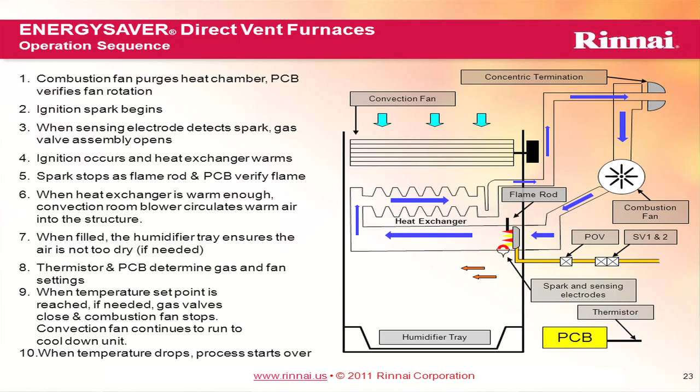And then once the heat exchanger warms, the convection fan will turn on and start moving air across this heat exchanger and ultimately into the structure. We do have a humidifier tray. If you're in a drier area and you would like to keep this full of water, you can, and it'll keep the air a little bit moist.

As I mentioned, our thermistor and our PC board are working together to set our firing rate, to make sure that we're not putting too much heat into the structure. And then when the temperature set point is reached, if needed, the gas valve will close. Of course, our flame will go out, and our convection fan will continue to run to cool down the heat exchanger and to get that last little bit of heat off of the heat exchanger.

The key part of number 9 here is if needed. Remember, because it's continuous run theory, the thermistor is working with the PC board. It may only stage way, way down into its lowest setting and slowly put heat out. So it's not overheating that main room, but we're still getting heat, so it's reaching out to the outer portions of the structure. And then the process starts over as needed as well.

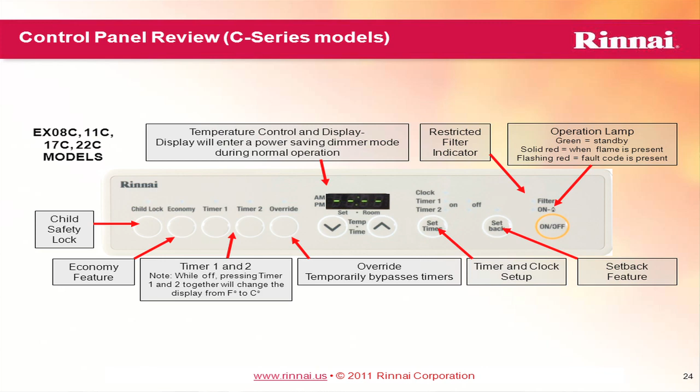Our control panel for most of the products you see here, you can see some of the different features. We do have 2 different timers that we offer on the product. Child safety and economy feature. We can override temporarily our timers if needed without losing our timer settings. And we have a setback feature as well. Working with the timers, you can use the setback feature to run at a lower temperature, maybe in the evening or when you're asleep, or perhaps when you are away and the house is not occupied, etc.

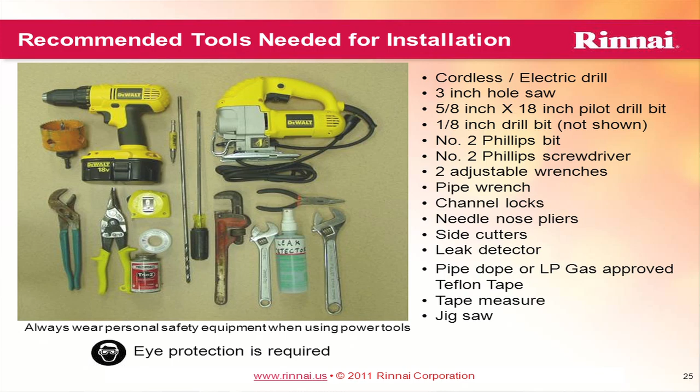So let's jump into the actual installation of the product. This is overall all of the tools that you would need, and you may not need all of these. You may not need the saw, and I'll show you. There's only one instance that you would. This product can usually be installed in about an hour, maybe 2 at the most, if your gas is already there and is available. It is not a hard install at all to do.

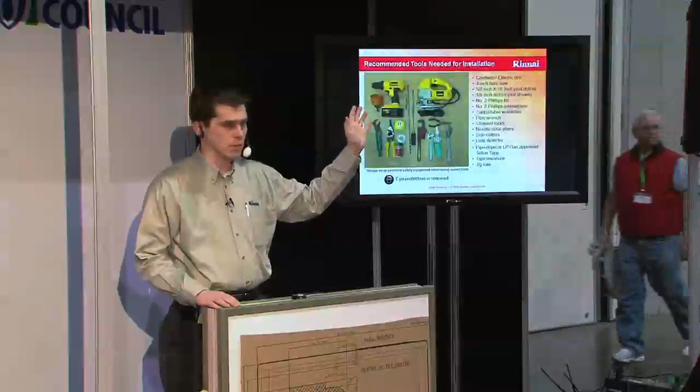Do we have anyone that's installed a direct vent before? I know we had a few people. All right, that's good to hear. I know New England is our biggest market for this product, and partially due because Jack Frederick and his group have been touting this product for well over a decade. So that's good to hear.

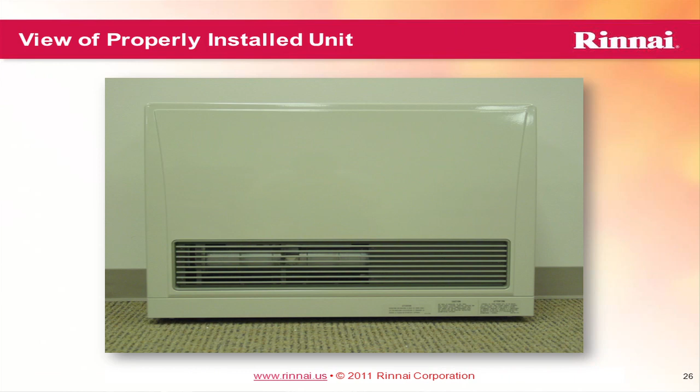All right, so you can see some of the things that we need, and as we go through this today, you'll see some of the things that we're going to do. This is what the product looks like when it is installed. And of course, when you get your box, and you can see I've got one here, you're going to get everything that you need to install this directly through the wall that it is installed on.

Now, if you need to have your vent termination somewhere else, let's say you're in a basement, you need to run up and then out, we do offer extension kits, and I'll briefly cover those toward the end of this presentation. But if you are going right through the wall, we give you everything you need.

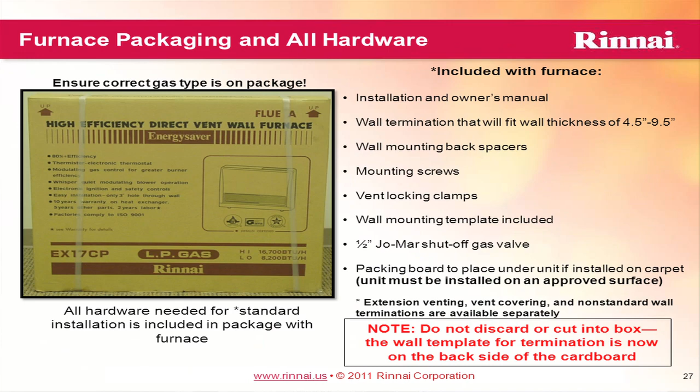Of note, we want to stress this, especially if you've been installing this product for a while. We used to give you a wall template for your venting. It used to be on a piece of paper in the box. It is no longer in the box, it's part of the box. And you can see this here, I've got the wall template here. So if you're installing the product, don't throw the cardboard away. Make sure that you cut this out if you need to use this.

And you can see everything here, and we're going to have this out here in just a moment. In fact, I'm going to come around right now. When this box comes off, you're going to see inside at the top, all of the hardware that you see in here actually sits here at the top. And we'll go ahead and remove this. I'll just move this out of the way.

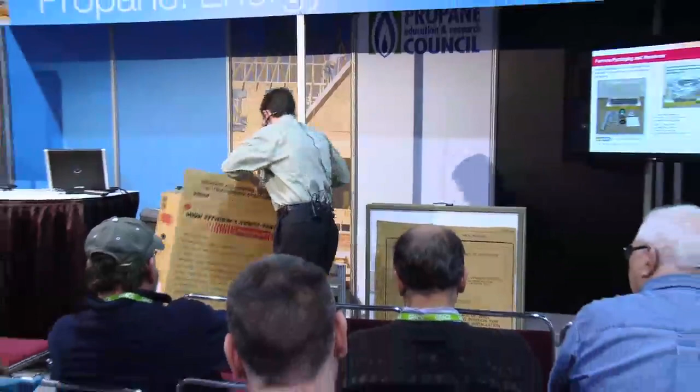And I tell you this because if you pull this up and off before you cut the template... I used to be over the call center, and we used to get calls occasionally where guys would just throw this whole thing away. And then they say, well, I didn't get any of the hardware. So always be aware of that. Everything you need is actually at the top of the box.

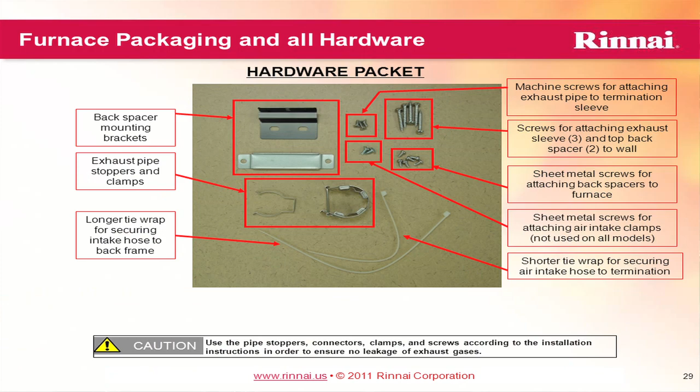And we'll go through this. Since this is empty here, I'll just put it here. Okay? And we'll be using that as we go forward. You'll have a small pack of hardware inside the box as well, right here. And we'll get that ready to use.

Now, if you are installing this product on carpet, we really want it to be on a hard surface. And let me say real quick too, one thing that sets Rinnai apart is we have a 24-hour technical support call center for installers and contractors, if you're not aware of that. So if you ever have any questions on any of our products, please call our 800 number, and hopefully we'll be able to give you the support that you need. And that is for technicians and installers. The 24-hour line is. The consumer line is 8 to 5 or 8 to 8 Eastern Standard Time.

But if we ever get a call on a product like this that is making a rattling noise, or a little bit of a knocking noise, the first thing we're probably going to ask is, is it on a hard surface and has it been leveled correctly? So we do want to stress, try to put it on a hard surface. Now I know right away you may think, well, that's not very feasible, and I don't want to put a big ugly piece of wood under this product. My consumer's not going to like that. So we want to walk through.

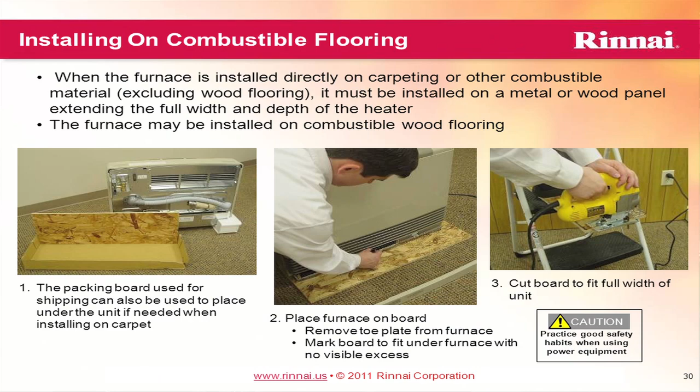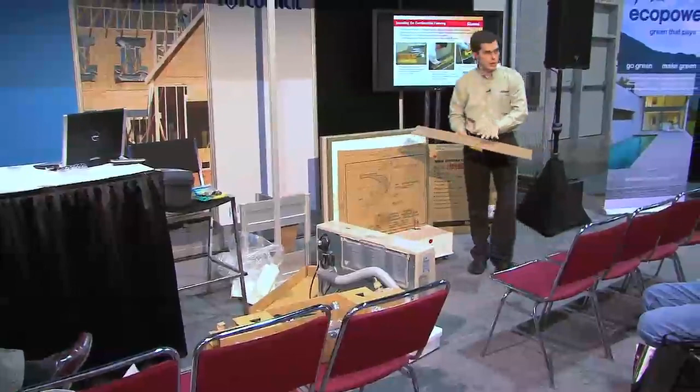In the shipping container itself, there is a piece of wood that is used just to firm up the shipping container. And you can actually use this, and I will lift this off of here. Take our plastic off. And we'll set this guy out. You can use this wood, and as I'm doing here, you can set the product on the wood and then score it just to the footprint of the product, and then install the product on it, and the consumer won't even see it. It will be totally underneath the product. We're even giving you the wood to do that.

In fact, we've got one right here. This is a piece that's been cut large enough to accommodate what we're trying to do, which is mainly get it on a hard surface. So we'll use this as part of our installation.

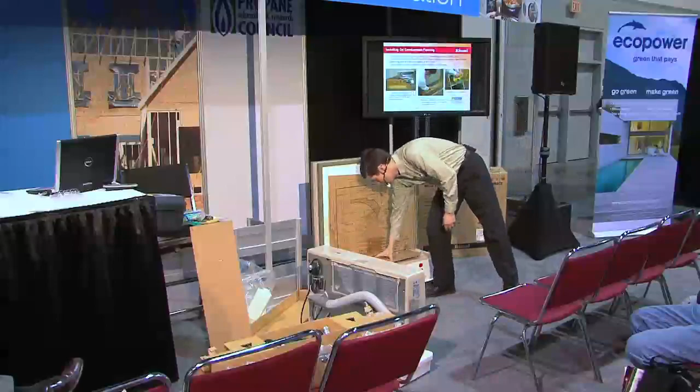All right, and I have set my clicker down here. What? Ah, thank you. I'm the world's worst about doing that.

All right, so you can see that, and that is the only time you would ever need the saw. If you're already on a hard surface, or you've already accommodated the floor for that, you don't need to use the saw at all. That's the only time we say you would need to do that.

Our clearances around the product, I'm going to come around here and get out of the way. You can see on the sides we want a 2-inch clearance. In the front we would like a 40-inch clearance. On the top we want a 9-inch clearance, and that's just to remove the filter. That's not an actual clearance from combustibles or anything like that, but we want to be able to take this filter out. And that is a cleanable filter, stays with the product. 0 clearance to the back as well, and we want 10 inches on each side for future servicing. So you can put furniture around it, just as long as you can get that out of the way in the future.

Yes and no. If you have a structure that will support the product, you can mount it on a wall. We really don't recommend going much higher than about a foot. We would say if you want to go on a fireplace hearth, because we get that call, that's fine. The thing to consider is this thermistor. The design of the product is the thermistor is designed to be 2 inches off the floor to quickly anticipate heat loss. So the higher that you mount that product, you're kind of going a little bit against the way it was designed, but you can do it if you need to.

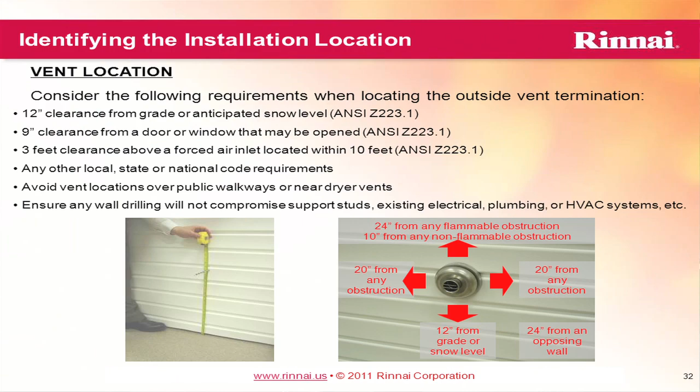Our clearance on the outside, this is what the termination looks like on the outside. It's only about this big. It's about 3 or 4 inches across, and aesthetically it doesn't look that bad. I've seen some of our competition, some other vented products. They're a lot larger.

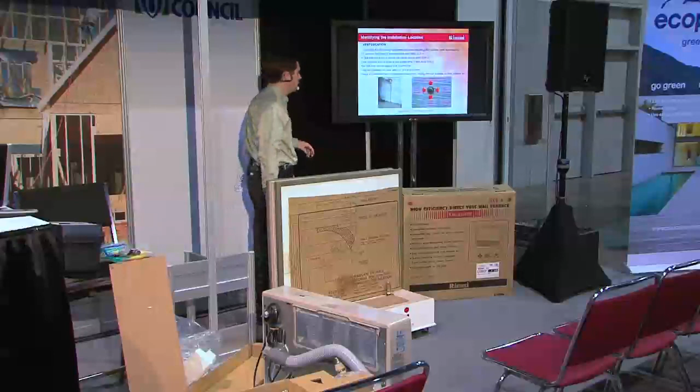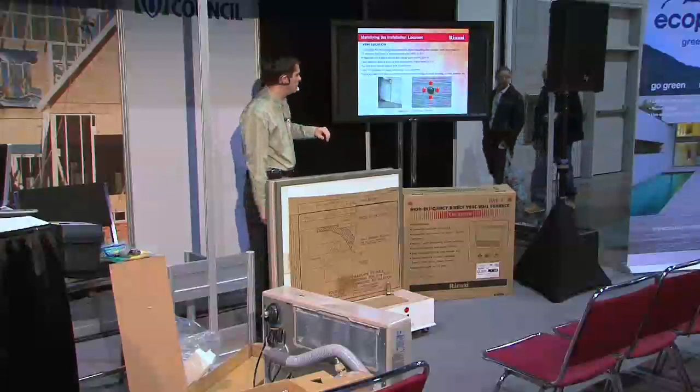So 20 inches on either side, 24 inches from any flammable obstruction at the top, 12 inches above anticipated snow level or grade, 24 inches from an opposing wall, and then here are ANSI, our national standard here, 12 inches from grade I mentioned, 9 inches from a door or window that may be opened, etc. So if you have any questions in detail on any of these, of course, you can see me after we're done, too.